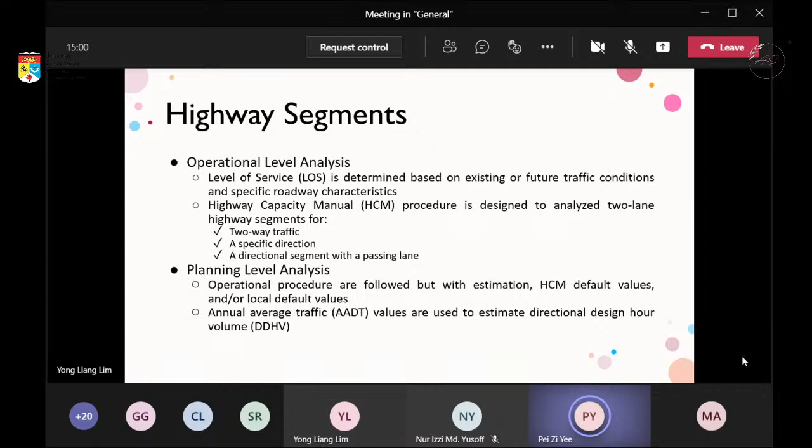At operational level analysis, level of service (LOS) is determined based on existing or future traffic condition and specific roadway characteristics. At planning level analysis, operational procedures are followed, but with the estimation of HCM default values and/or local default values.

There are two measures used to describe the service quality of two-lane highways, which are percent time spent following another vehicle (PTSF) and average travel speed (ATS). PTSF is the average percentage of time that vehicles are traveling behind slower vehicles. It is a measure of the quality of service provided by the highway. ATS is the space mean speed of vehicles in the traffic stream. It is a measure of the degree to which the highway serves its function of providing efficient mobility.

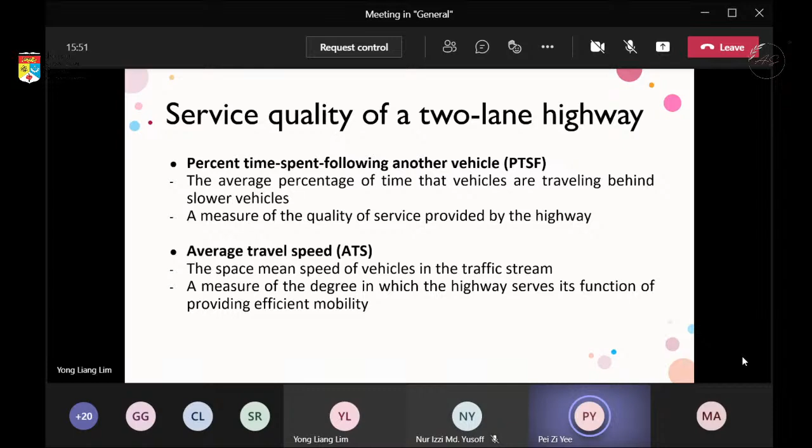Capacity of a two-lane highway is 1,700 passenger cars per hour. For extended segments, capacity will not exceed a total of 3,200, and for short sections, capacity will be about 3,200 to 3,400. Level of service is the performance of a highway at traffic volumes less than capacity. LOS for Class 1 is based on PTSF and ATS, and LOS for Class 2 is based on PTSF. LOS criteria are applied to travel during the peak 15 minutes of travel and on highway segments of significant length. The highest level is A and the lowest is F.

Okay thank you Basil. And I'm going to continue with the relationship of speed, flow, and percentage time spent following with the two-way flow rate. For the graph of average travel speed versus two-way flow rate, it shows that when the number of vehicles increases, which is the two-way flow rate increase, it will reduce the average travel speed as shown in the graph. For the graph of percentage time spent following versus two-way flow rate, it shows that when the number of vehicles increases, it increases the percentage time spent behind slower vehicles.

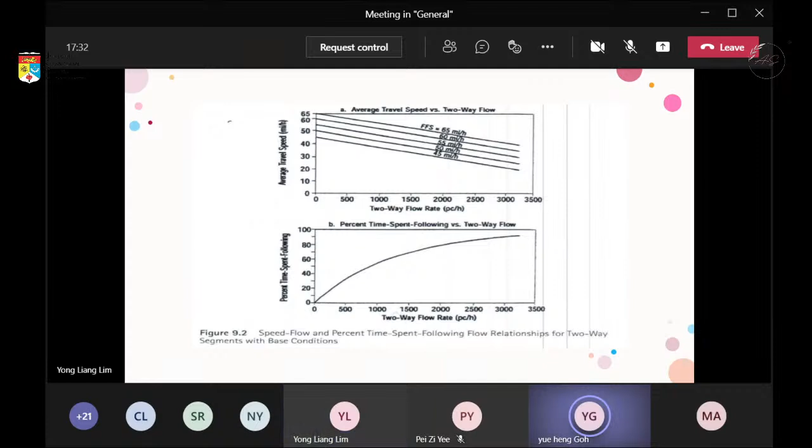So now I'm going to talk about the characteristics of every level of service from A to F. Level of service A is the highest quality service that can be achieved. Motorists are able to travel at their desired speed. The need for passing other vehicles is below the capacity for passing, and few platoons of 3 or more cars are observed. For Class 1 highway, average travel speed (ATS) is 88 km per hour or greater. For PTSF, the average percentage of time that vehicles are traveling behind a slow vehicle is 35% of the time. And the maximum service flow rate two-way under base condition is 490.

Level of service B: if vehicles are to maintain the desired speeds, the demand for passing other vehicles increases significantly. Class 1 highway average travel speed is 80 to 88 km per hour. PTSF travel delays are between 35% to 50% of the time. The maximum service flow rate under base condition is 780.

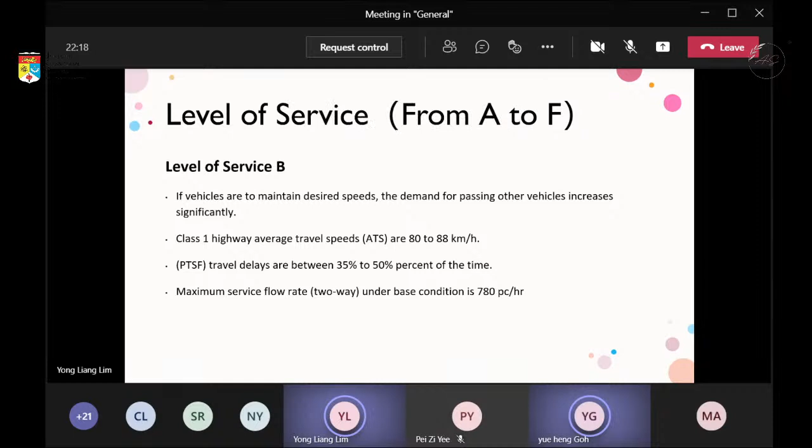As this slide shows, the average travel speed ATS is 72 to 80 km per hour, and the PTSF is between 50% to 65%. So level of service C will be the answer of that question.

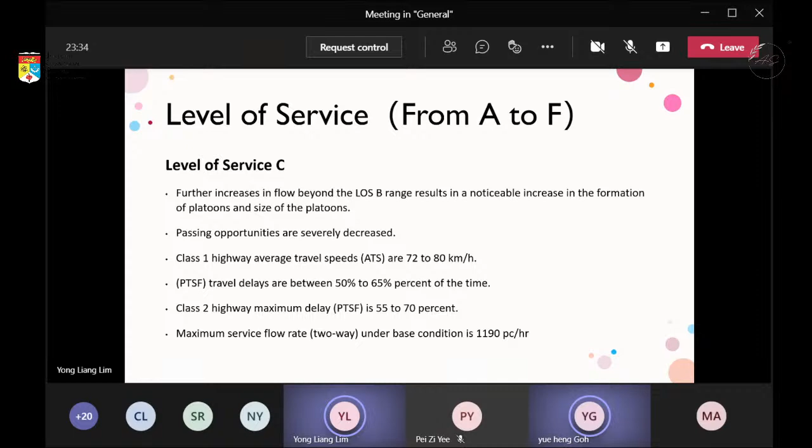So you can go and do the previous one. The answer shows that segment 2 is level of service type C. So if you go to this slide, you can actually find the answer below. This is all for me, so I'm going to pass to another member to continue our presentation. Thank you.

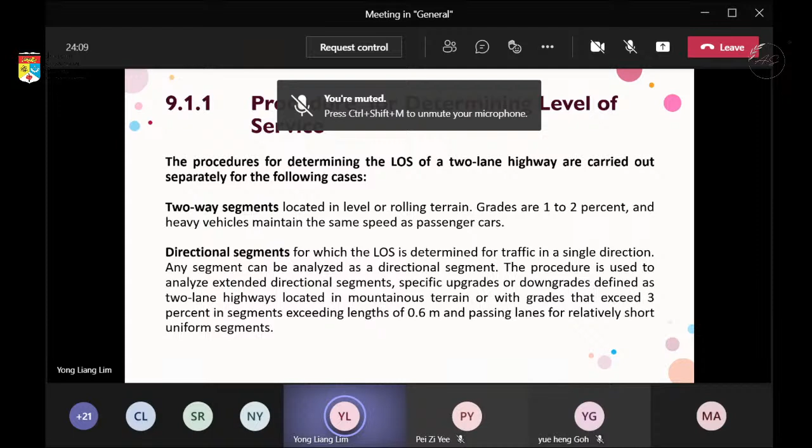I would like to present about the procedure for determining level of service. There are 2 ways to determine the level of service. The first is two-way segments located in level or rolling terrains, with grades of 1 to 2%, where heavy vehicles maintain the same speed as passenger cars. The second is a directional segment, for which the LOS is determined for traffic in a single direction. Any segment can be analyzed as a directional segment. The procedure is used to analyze extended directional segments, specific upgrades or downgrades defined as 2-lane highways located in mountainous terrain or with grades exceeding 3% in segments exceeding lengths of 0.6 miles, and passing lanes for relatively short uniform segments.

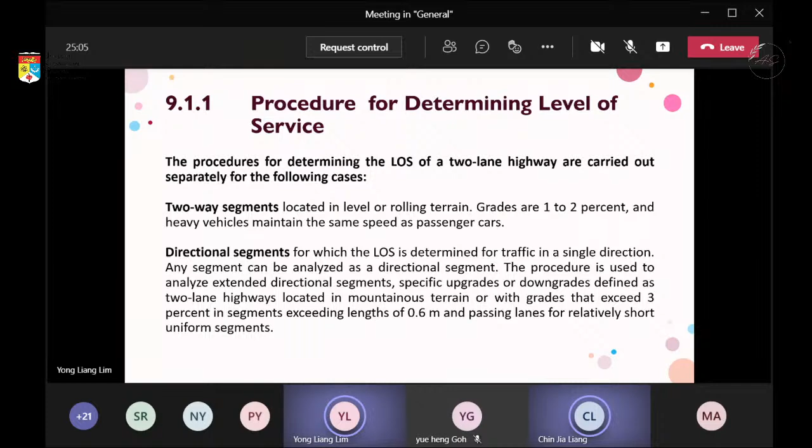This is the two-way segment. The analysis of two-lane roads for two-way segments is usually performed on extended lengths when the segment length is at least 2.0 miles and the segment is located in level or rolling terrain. The level terrain segment contains flat grades of 2% or less, where heavy vehicles are able to maintain the same speed as passenger cars throughout the segment. The rolling terrain segment contains short or medium length grades of 4% or less.

Heavy truck speeds are slower than passenger car speeds but are not at crawl speed. If grade exceeds 4%, the two-way segment procedure cannot be used but must be analyzed using the specific grade procedure.

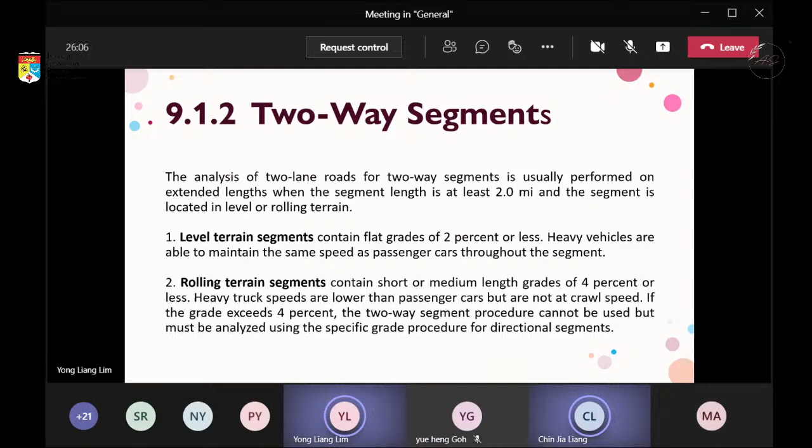For direction segments, here is the formula to calculate the two-way segment: PTSF equals BPTSF plus FD over NP. FD over NP is an adjustment in PTSF to account for the combined effect of directional distribution of traffic and non-passing zones. Where BPTSF is the base percent time spent following for both directions, computed using equation 9.2.

BPTSF equals 100 times 1 minus exponent of 0.000879 VP. VP is the passenger car equivalent flow rate for the peak 15 minute period, computed using equation 9.3.

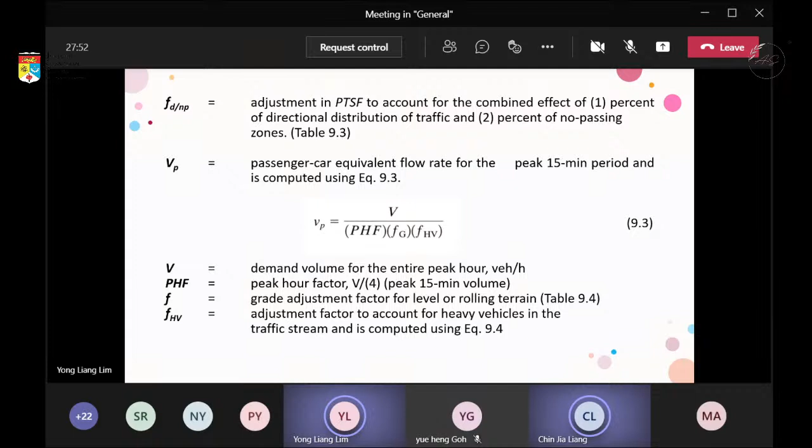VP can be found using equation 9.3: V over PHF times FG times FHV. V is the demand volume for the entire peak hour, PHF is the peak hour factor, FG is the grade adjustment factor for level or rolling terrain, and FHV is the adjustment factor to account for heavy vehicles in the traffic stream, computed using equation 9.4.

This is equation 9.4. PT and PR are the decimal portion of trucks, buses, and RVs in the traffic stream. For example, if there are 22% trucks in the traffic stream, then PT is equal to 0.22.

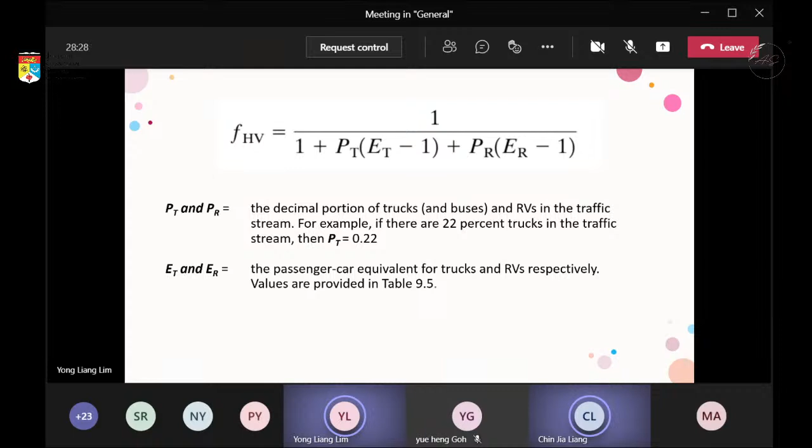ET and ER, the passenger car equivalents for trucks and RVs, respective values are provided in table 9.5.

Since the values of ET and ER are functions of two-way flow rates in PC per hour, an iterative process is required in which a trial value of VP is based on the PHF only. Then a new value of VP is computed using appropriate values of ET and ER. If the second value of VP is within the range used to determine truck and RV equivalents, the computed value is correct. If not, a second iteration is required using the next higher range of flow rate.

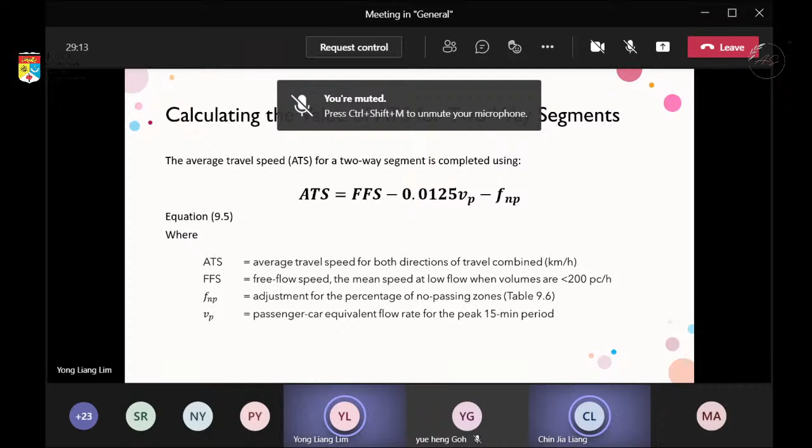Now we're going to discuss how to calculate the value of ATS, average travel speed, for a two-way segment. The average travel speed ATS equals FFS minus 0.0125 times VP minus FNP.

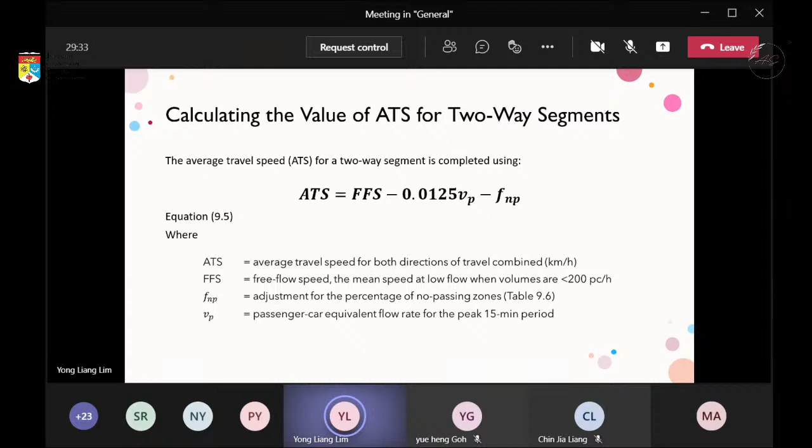First, we need to know how to calculate FFS, the free flow speed. There are two ways to calculate it: one is for known field data, and one is for unknown field data. For known field data, there are two cases.

For measurements at volumes smaller than or equal to, or bigger than, 200 passenger cars per hour, we use the following equation: FFS equals SFM plus 0.01249 times VF over FHV. The FHV is discussed previously in the previous slide.

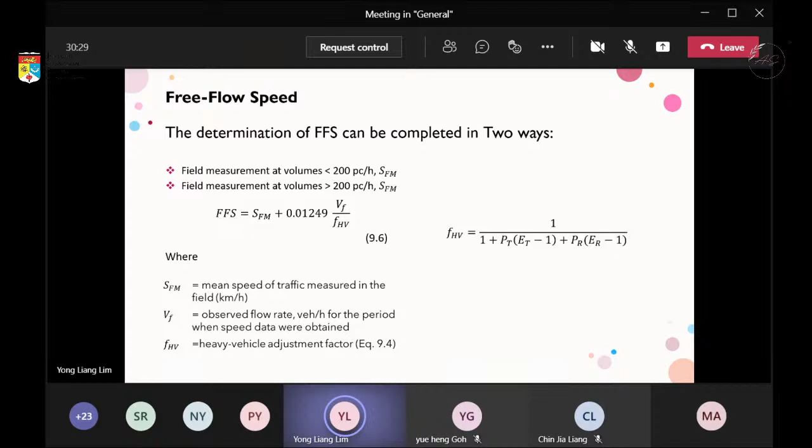For the unknown field data equation, we use FFS equals BFFS minus FLS minus FA. FLS is the adjustment for lane and shoulder width, and FA is the adjustment for the number of access points per mile.

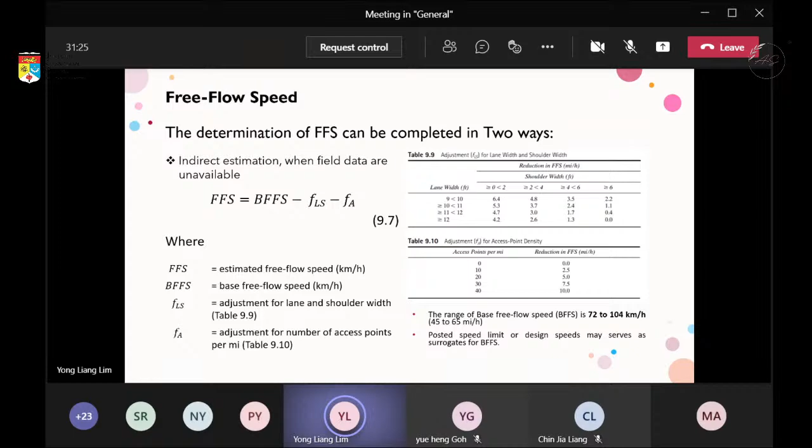For FLS, we use table 9.9 as shown on the right hand side, and for FA we use table 9.10. BFFS is the base free flow speed, with a range of 72 to 104 kilometers per hour.

Now we're going to discuss example 3, on how to compute the value of average travel speed for a two-directional two-lane highway.

Based on the equation, use the data provided in example 9.2 to estimate the average travel speed. Assume the base free flow speed BFFS is the posted speed of 96 kilometers per hour. The section length is 9.6 kilometers. Lane width is 3.35 meters, shoulder width is 1.2 meters, and there are 20 access points per kilometer.

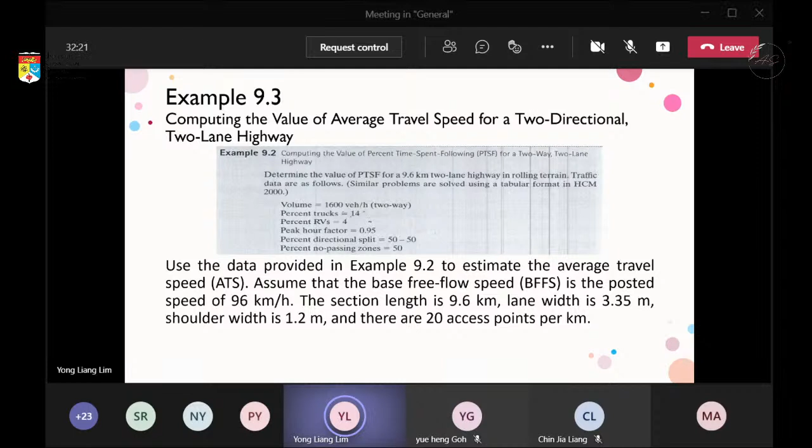Step 1, we're going to find the FFS first. In order to calculate the ATS, we need to first find the free flow speed, using the equation shown in the previous slide.

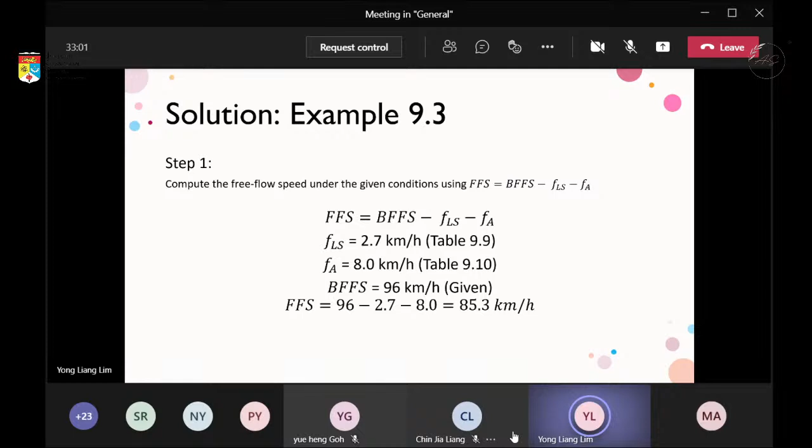First, we can get FLS equal to 2.7 kilometers per hour, FA equal to 8.0 kilometers per hour, and BFFS equal to 96 kilometers per hour. Therefore, we can get the FFS equal to 85.3 kilometers per hour.

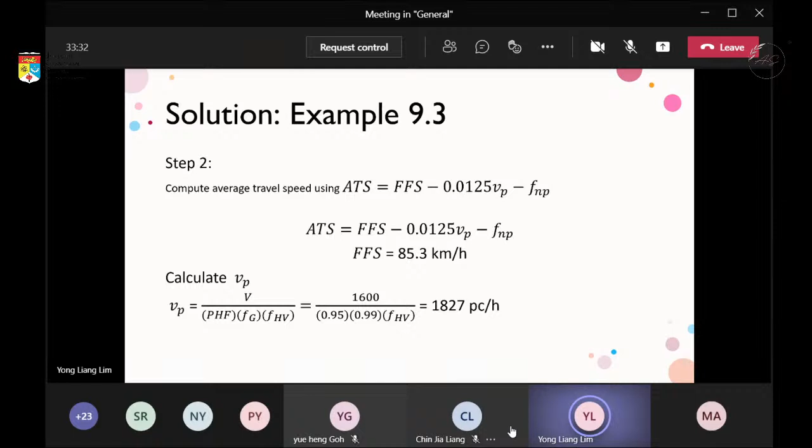Then we can substitute the value inside the ATS. But first, we need to know two unknowns, VP and FNP. For VP, we're going to use this formula. By substituting the data given, we can get VP equal to 1,827 passenger cars per hour.

And with the following data given, we can get the FHV. By substituting it in the following equation, we get FHV equal to 0.931. Substitute all the values inside the ATS equation, and we get ATS equal to 61.2 kilometers per hour.

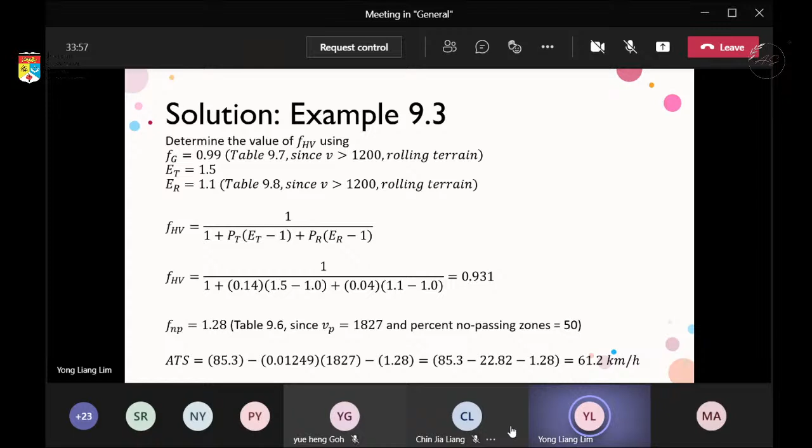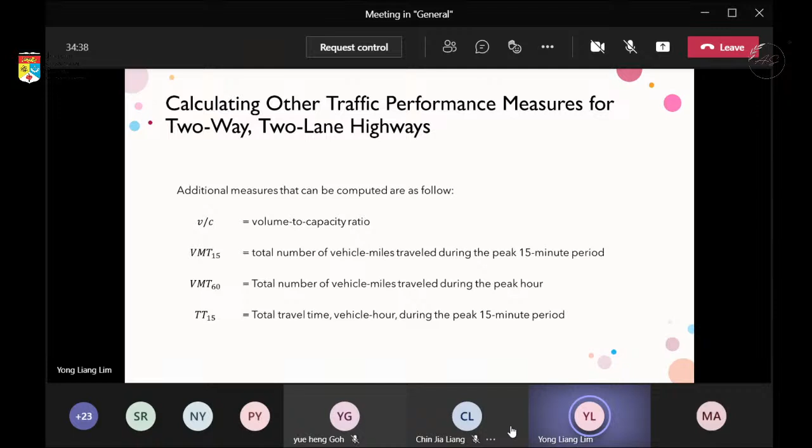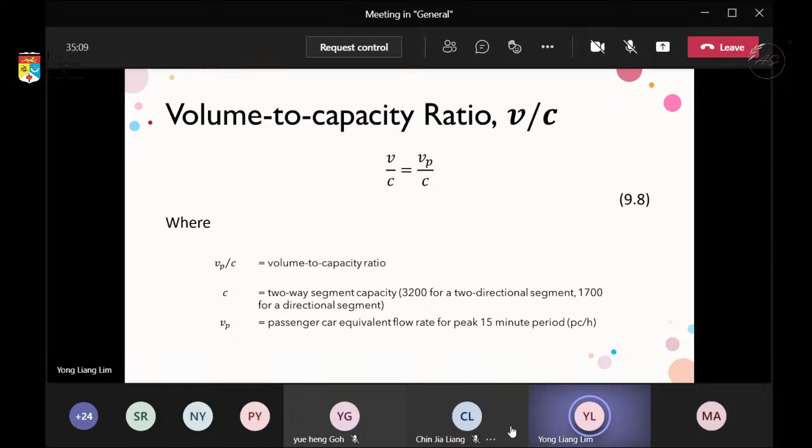First, the volume to capacity ratio, V over C, we can get also from V over C equal to VP over C. VP over C is the volume to capacity ratio. C is the two-way segment capacity, normally 3,200 for the two-directional segment and 1,700 for a directional segment.

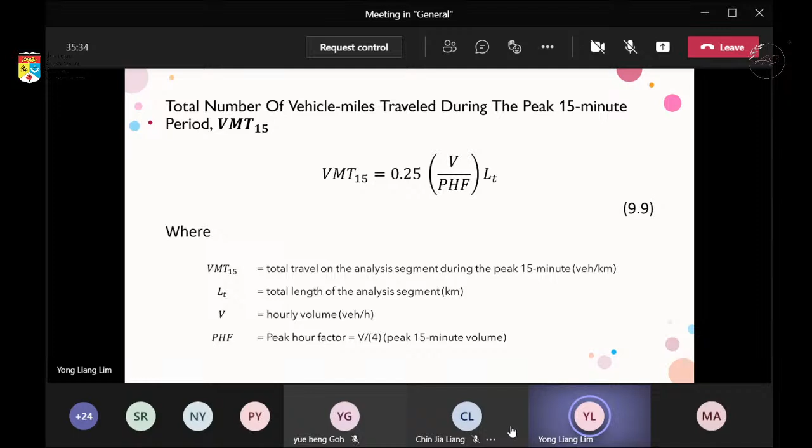The second is VMT15 equal to 0.25 times V over PHF times LT. PHF is the peak hour factor, while LT is the total length of the analysis segment in kilometer units.

Next is VMT60 equal to V times LT. LT as shown just now.

So now we proceed to TT15. TT15 equal to VMT15 divided by ATS. We calculate like the previous slide to get the ATS first, then we can substitute it into the following equation to get the TT15.

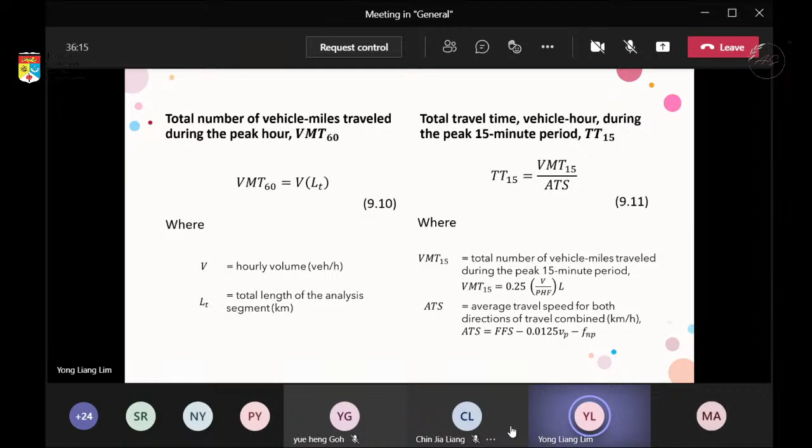Now I'm going to discuss example 9.4, level of service and performance measure for two-lane, two-directional highways. We'll use the data from and the results in example 9.2 and 9.3 to determine the following.

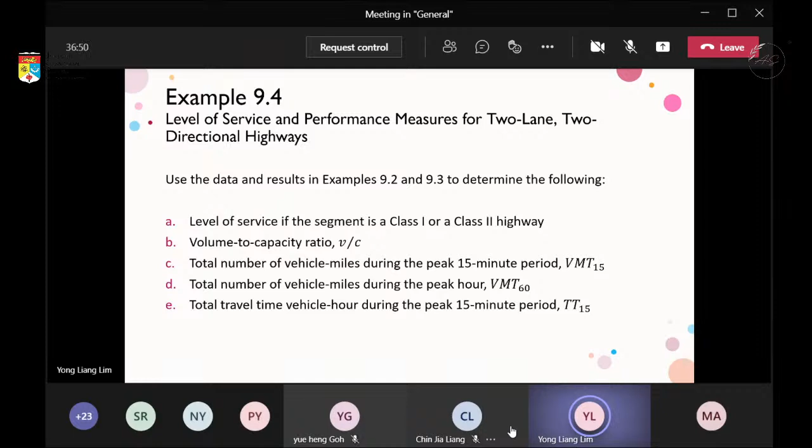First, calculate the level of service. Second, the volume to capacity ratio. Third, VMT15, and VMT60 and TT15.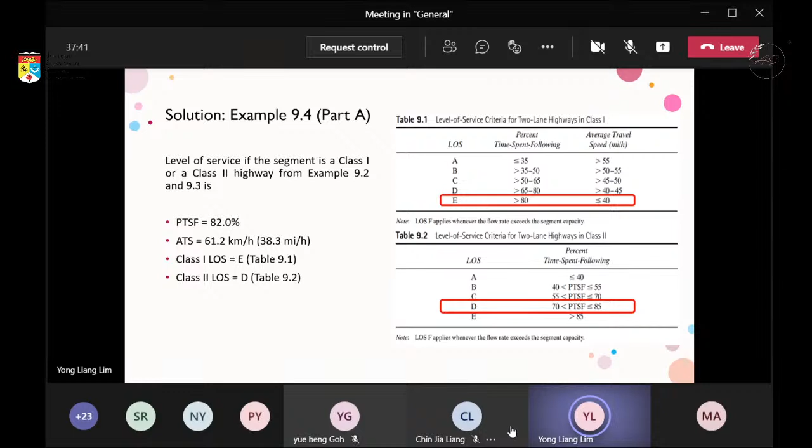For part B and C, part B is just substituting the value of VP over C, then we get the VC equal to 0.57, while for VMT15 we use the formula 0.25 times 1600 divided by 0.95 times 9.6. We can get VMT15 equal to 4042 vehicles per kilometer.

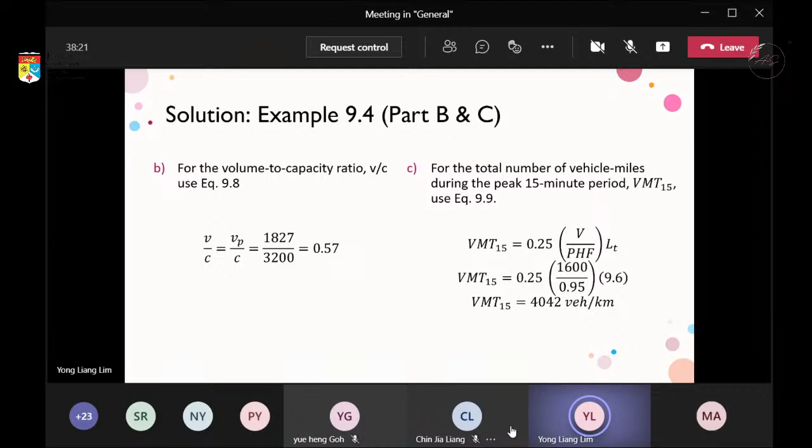For part D and E, the VMT60, by substituting the value V times LT, we get the value 15,360 vehicles per kilometer. And for the total travel time during the peak 15-minute periods, TT15, we use back the value of VMT15, 4,042 divided by 61.2, to get 66 vehicle hours.

Now I'm going to pass to my groupmate to continue our presentation.

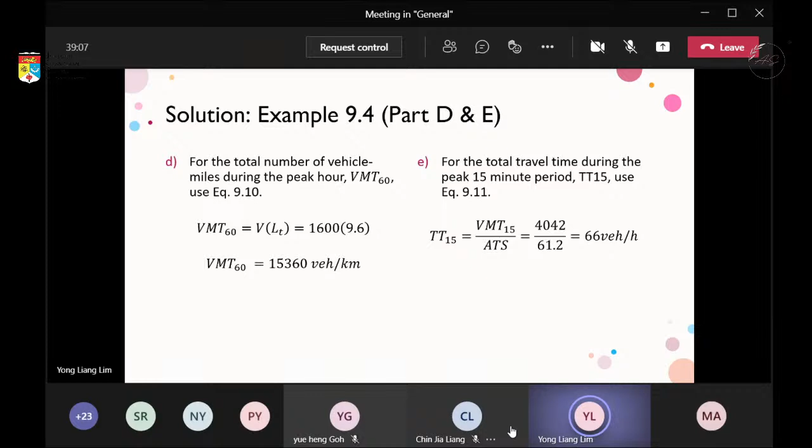Okay, directional segment. There are three categories of directional segment considered. First is extended segment, located in level or rolling terrain with a length of at least 2 miles. The second is specific upgrade or downgrade, located in mountainous terrain or with grade of at least 3% and segment length of at least 0.6 mile long.

The number 3 is passing lane. A passing lane added within a section in level or rolling terrain, or as a truck climbing lane.

Okay, to calculate the value of PTSF for directional segment in level or rolling terrain, we use equation 9.12. To calculate this PTSFD, we need PTSFD equal to BPTSFD plus FNP. So BPTSFD equal to 100 times 1 minus E power of AVD power of B.

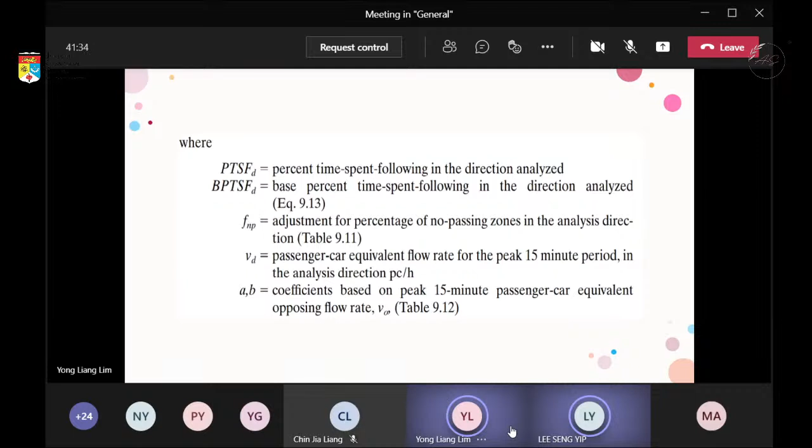I will go through example 9.5, computing the value of percent time spent following (PTSF) for the peak direction on a two-lane highway. I will read the example.

During the peak hour on a class 1 two-lane highway in rolling terrain, volume northbound is 1,200 vehicles per hour and volume southbound is 400 vehicles per hour. The PHF is 0.95, with 14% trucks/buses and 4% RVs. Lane width is 11 feet, shoulder width is 4 feet. The roadway section is 5 miles long with 20 access points per mile. There are 50% no-passing zones and the base free flow speed is 60 miles per hour. Determine the percent time spent following in the peak direction of travel.

For step 1, we need to compute the peak 15-minute hourly passenger car equivalent in the peak direction, VD, and in the opposite direction, V0. We try the value of VD per PHF equal to, so we get 1,263 vehicles per hour. Next we determine FG and ET and ER as in the previous slide. We compute FHV with this equation and get 1.00.

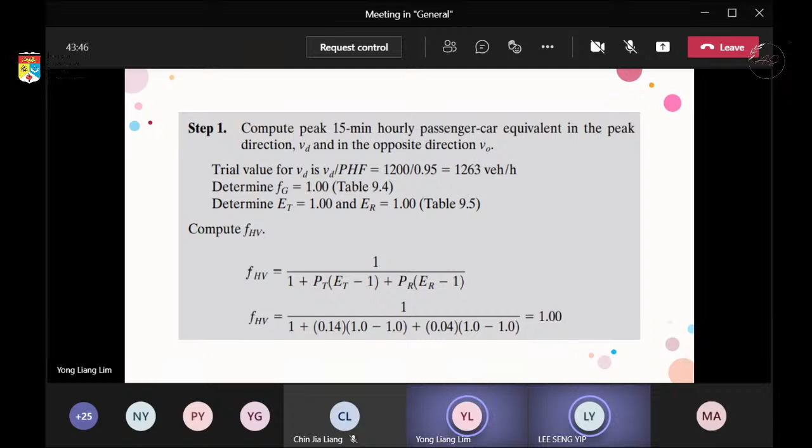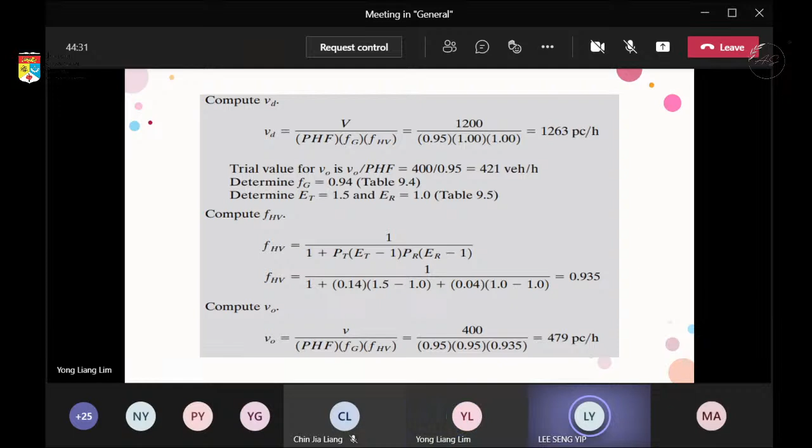We compute VD using the equation V per PHF times FG times FHV, and get 1,263 PC per hour. Then we try V0 per PHF equal to 400 per 0.95, giving 421 vehicles per hour. We compute FHV again and get 0.935. After that we compute V0 and get 479 PC per hour.

For step 2, we compute the base percent time spent following (BPTSF) using equation 9.13, shown in the previous slide. We determine the values A and B from table 9.12 by interpolation, then calculate BPTSFD equal to 84.7%.

For step 3, we compute the percent time spent following (PTSF) using equation 9.12. We use table 9.11 to determine FNP, obtained from the equation. We calculate PTSFD equal to BPTSFD plus FNP, so 84.7 plus 11.5, giving 96.2%.

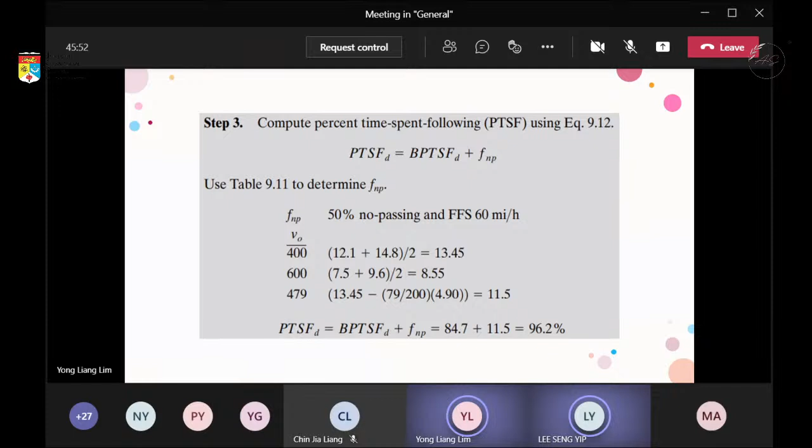Hello. I'm going to talk about the value of ATS, average travel speed for a directional segment in level or rolling terrain. The equation for ATS is FFS minus 0.0125 times (V plus V0) minus FNP. ATS is the average travel speed in the analysis direction in km/h. FNP is the adjustment for the percentage of no-passing zones in the analysis direction from table 9.13, and FFS is the free flow speed in the analysis direction.

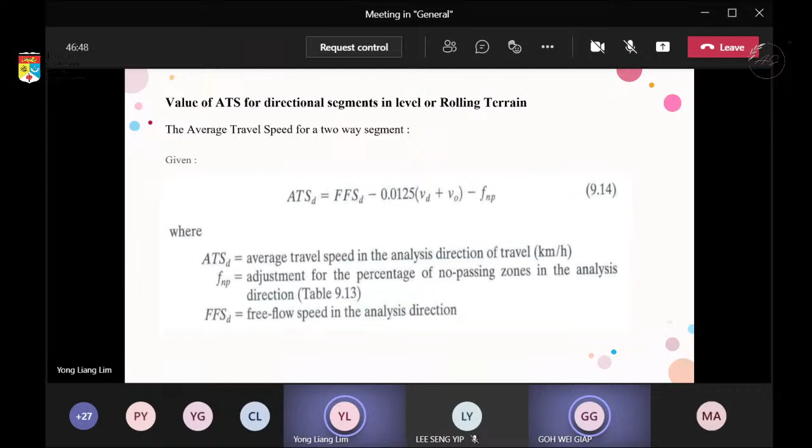I'm going to go through example 9.6, about the ATS for the peak direction on a two-lane highway. Step 1 is the same as in example 9.3. We know that FFS is equal to 85.3 km per hour, and now we are going to compute V.

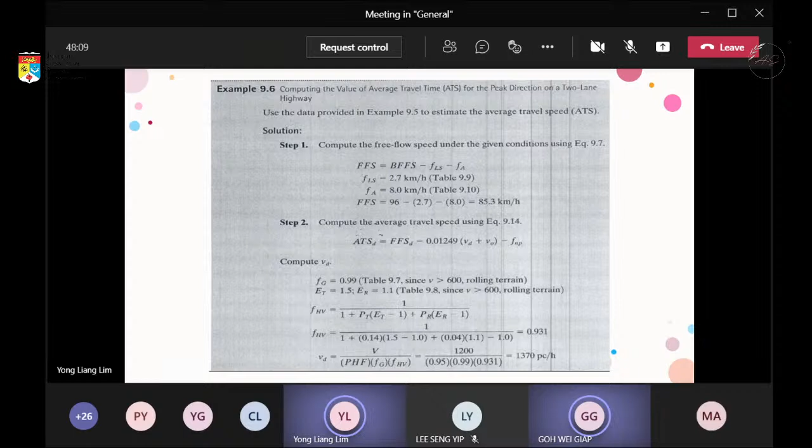From table 9.7, our V is more than 600 and it is rolling terrain, so FG is 0.99, ET is 1.5, ER is 1.1, from table 9.8. We substitute into the equation to find FHV and get 0.931. Substituting V equals 1,200, PHF is 0.95, FG is 0.99, FHV is 0.931, we get the value 1,370 passenger cars per hour.

Now we compute V0 using the same procedure. First we find FG from table 9.7, with V equal to 400, and from the table we find FG is 0.93, ET is 1.9, ER is 1.1 from table 9.8. We get FHV equal to 0.884, and V0 equal to 512 passenger cars per hour. Both V and V0 are less than the total capacity.

The capacity of a one-way segment is 1,700. FNP is equal to 1.6 using table 9.13 by interpolation, and we get ATS equal to 85.3 minus 0.0125 times (1,370 plus 512) minus 2.56. The 2.56 is the conversion of FNP 1.6, because the table shows 1.6 in miles per hour, so we convert it into kilometers per hour, from 1.6 to 2.56. So our total ATS is 60 km per hour.

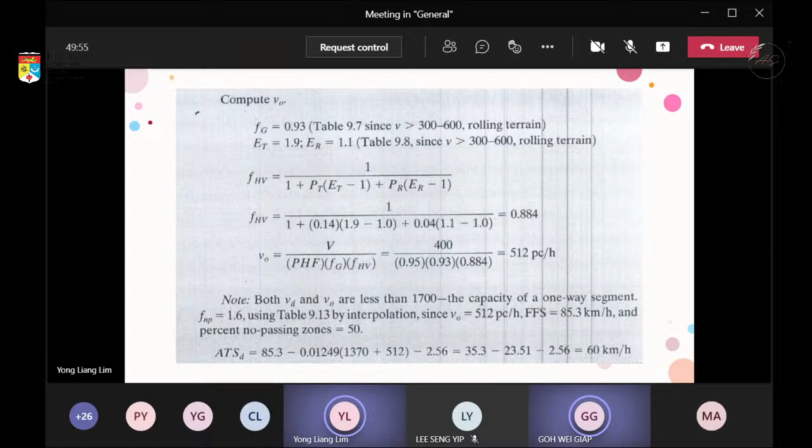Now we will discuss example 9.7. Use the data and results from examples 9.5 and 9.6 to determine the following: Question A, level of service if the segment is a class 1 or class 2 highway.

If the segment is class 1, refer to table 9.1. Since PTSF equals 96.2%, which is larger than 80%, it is LOS E. If the segment is class 2, refer to table 9.2. PTSF is larger than 85%, so it is LOS E.

Question B, volume to capacity ratio using equation 9.8 equals VP over C, equals 1,370 over 1,700, where 1,700 is the capacity of the one-way segment. We get the answer of 0.81.

Question C, total number of vehicle miles during the peak 15-minute period, VMT15, using equation 9.9 equals 0.25 times V times LT over PHF. By substituting the value, we get the answer of 3,032 vehicle kilometers.

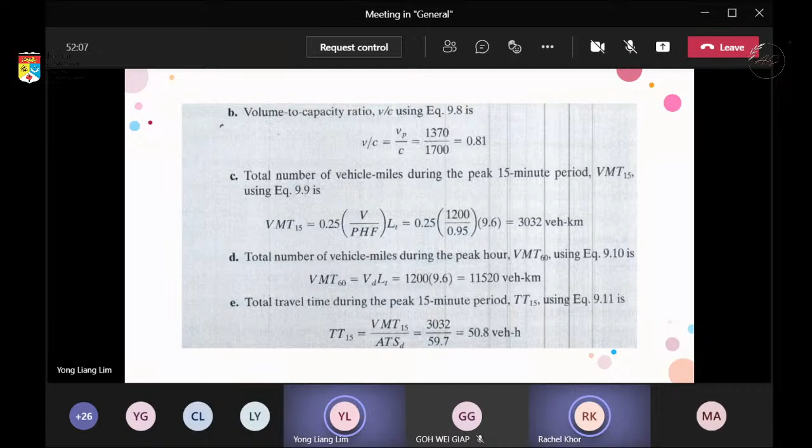Total travel time during the peak 15-minute period, TT15, using equation 9.11 equals VMT15 over ATSD. We get the answer of 50.8 vehicle hours. Thank you. Next.

Okay, we will pass to the other member. Thank you. So we are going to discuss the value of PTSF and ATS for directional segments of specific upgrade, with grade of 3% or more and at least 0.6 mile in length.

Length of 0.25 miles or more and upgrade of 3% or more. Segments in mountainous terrain are to be analyzed as a specific upgrade. When grade varies within a section, a composite grade is computed as the total change in elevation divided by the total length, expressed as a percentage. The effect of heavy vehicles is determined based on the average segment grade and segment length.

To calculate PTSF, first we must determine FG from table 9.14, ETER from table 9.15, then FHV using equation 9.4. PT and PR is the decimal portion of trucks and RVs in the traffic stream. ET and ER is the passenger car equivalent for trucks and RVs respectively.

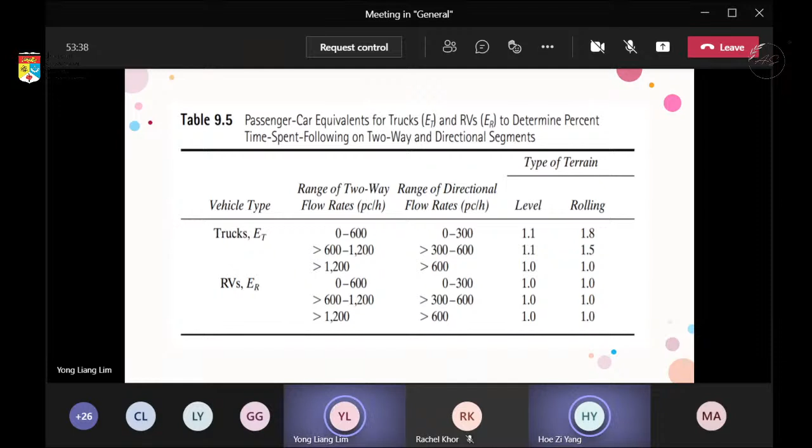This is table 9.5 to determine the ET and ER. Next, table 9.14 and 9.15. Table 9.14 is to determine the grade adjustment factor. Table 9.15 is ETER for estimating percent time spent following on specific upgrade.

To calculate ATS, firstly we must determine FG from table 9.16, ETER using tables 9.17 and 9.18, then FHV using equation 9.4. After that, using equation 9.3, we determine VD. Next, using equation 9.3 to determine V0. We should note that when computing V0, the values used for FHV and PHF should apply to the opposing direction of travel. Then finally, we compute PTSF and ATS following the procedure used for directional analysis as described for level and rolling terrain.

Table 9.16 is used to determine the grade adjustment factor on specific upgrade. Table 9.17 is used to determine ET for estimating average travel speed on specific upgrade. Table 9.18 is used to determine ER on specific upgrade.

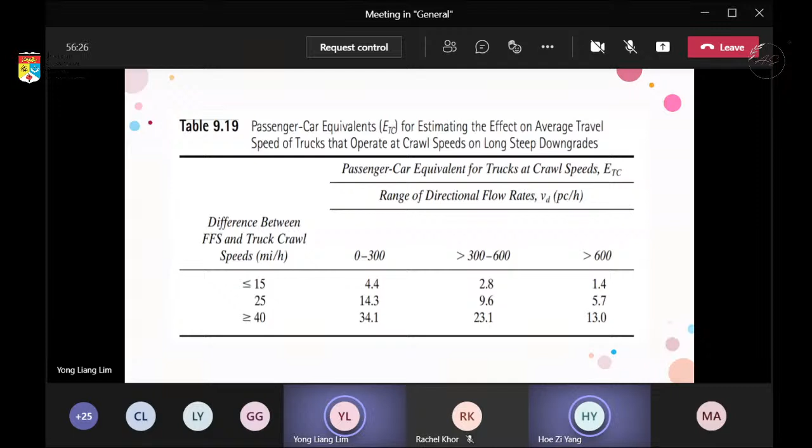Example 9.8 to compute the volume on a directional segment for specific upgrade and downgrade. First, we determine the value of VD for the specific upgrade: determine FG using table 9.14, ET and ER using table 9.15, then FHV using equation 9.4. After that, we use the values to compute VD using equation 9.3, and we get VD equal to 1,405 passenger cars per hour.

Next, we determine V0 for the specific downgrade: FG on downgrade, then ETC using table 9.19, ET and ER using table 9.5, and FHV using equation 9.4. After that, we substitute the values into equation 9.3 to determine V0 equal to 468 passenger cars per hour.

Next, calculating percent time spent following, PTSF, for directional segment.

Hello, can you hear? Low volume. Hello.

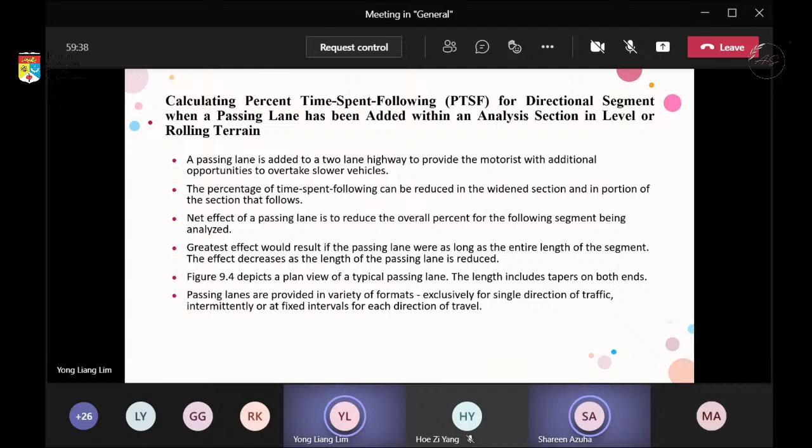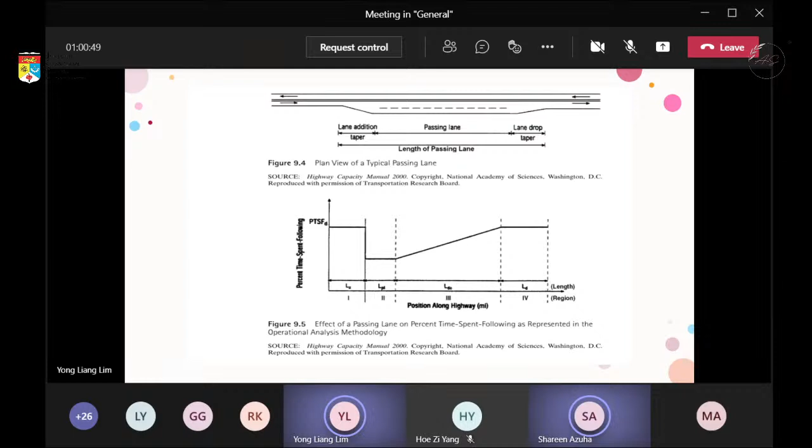For region 4, it is the remaining downstream region within the segment and is known as LD. This is beyond the effective length of the passing lane. The passing lane value PTSFD is equal to the upstream section of LU.

The average value of PTSF for the entire analysis segment with a passing lane, PTSF PL, is calculated using this equation. If the full downstream length is not reached because a traffic signal or town interrupts the analysis section, then L is replaced by a shorter length LDE, as shown in equation 9.17.

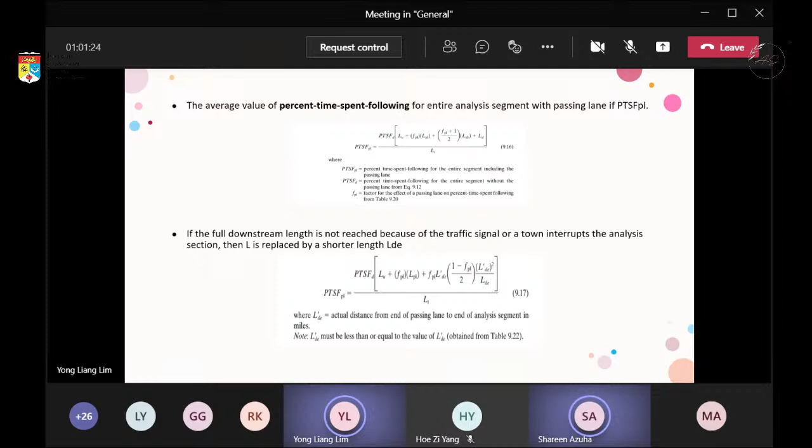Next is calculating average travel speed (ATS) for directional segments when a passing lane has been added within an analysis section in level or rolling terrain.

Figure 9.6 illustrates the changes in the value of average travel speed ATS that occur within each of the four regions when a passing lane has been added. Below are the values for region 1.

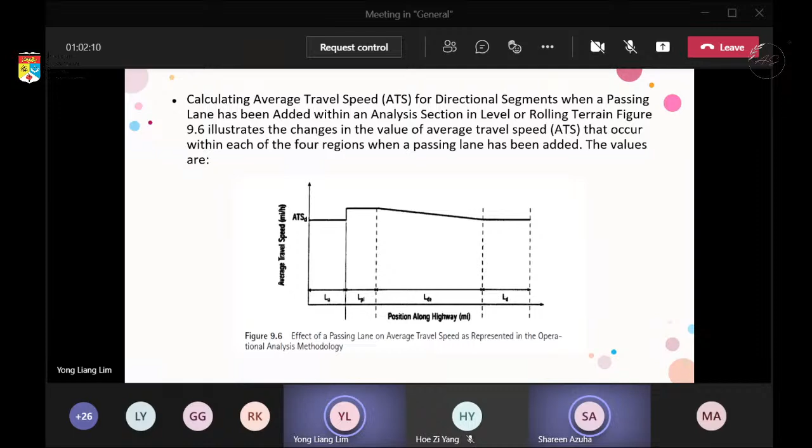For region 1, the average speed in the upstream region is ATSd for length LU. In region 2, the average travel speed in the passing lane increases by factor FPL, provided in Table 9.20. The values range from 1.08 to 1.11 depending on the directional flow rate VD.

Region 3 is the average travel speed within the downstream length, which decreases linearly from the value in region 2 to ATS at LDE, equal to 1.7 miles, as shown in 9.22.

Region 4 is the average travel speed in the downstream region, ATSD, for length LD. To compute the average speed for the analysis section, it is first necessary to compute the individual travel times within regions 1, 2, 3, and 4. The average travel speed is the total analysis length LT divided by the sum of the four travel times.

The derivation below produces equation 9.18. The value of ATS PL is the effect on the average travel speed in the analysis section as a result of adding a passing lane.

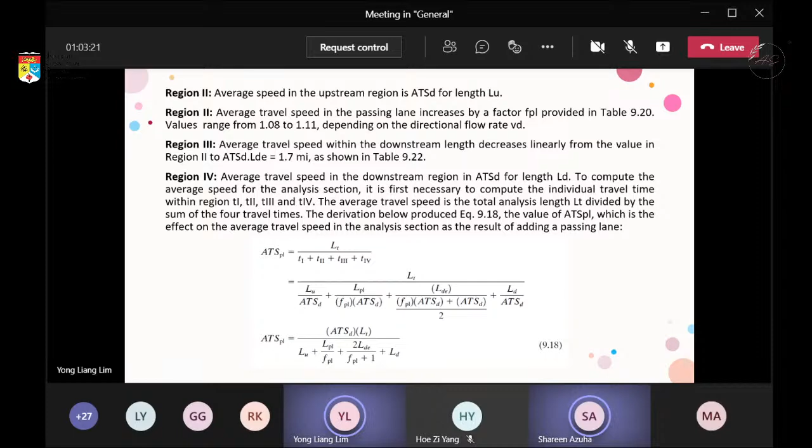Next, we are going to see example 9.9, which is the last example for our presentation: computing level of service for 2-lane directional highways with a passing lane.

Use data and results from example 9.5 and 9.6 to determine the LOS if a passing lane is added. The length of the passing lane is 1 mile and is designed to begin 1 mile downstream from the beginning of a 6-mile analysis section. From examples 9.5 and 9.6, we get PTSF equal to 96.2% and ATS equal to 37 miles per hour.

For step 1, determine the length of each region. For region 1, LU is equal to 1 mile. For region 2, LPL is equal to 1 mile.

For region 3, for PTSF, LDE is equal to 3.6 miles, which we can see from Table 9.22. From example 9.5, the VD is 1263 passenger cars per hour, which is greater than 1000, so we choose PTSF LDE equal to 3.6 miles.

So the FPL is 0.62. For ATS LDE, referring to example 9.6, the VD is equal to 1370 passenger cars per hour, which is greater than 1000. So the ATS LDE is equal to 1.7 miles from Table 9.22, and FPL is equal to 1.11 from Table 9.20.

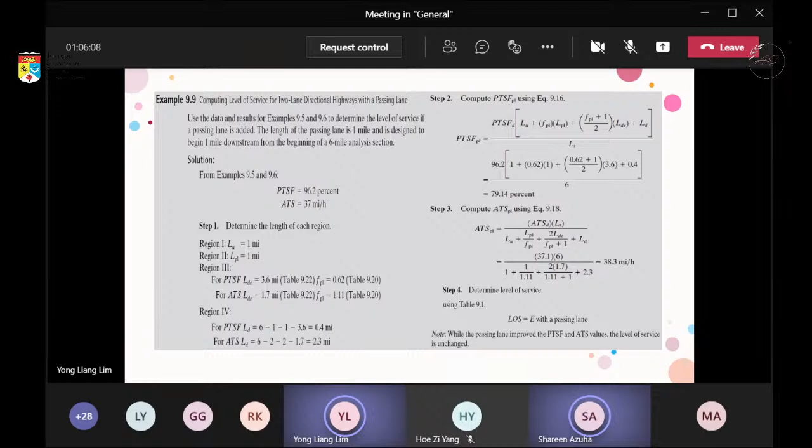79.14%. For step 3, we can compute the ATSPL using equation 9.18. Substitute also and we get 38.3 miles per hour. So with this answer, we refer to table 9.1, which is LOS criteria for 2-lane highways in class 1. So we can get the LOS is equal to E with a passing lane.

Okay, next, calculating the average travel speed ATS for directional segment when a climbing lane has been added within an analysis section on an upgrade. So it's warranted into 2 lane highways when one of the following conditions is met. First is directional flow rate on the upgrade 200 vehicles per hour. Second is directional flow rate for trucks on the upgrade 20 vehicles per hour. And when any of the following conditions apply: speed reduction for trucks is 10 miles per hour for a typical heavy truck, LOS is E or F on the grade, or LOS on the upgrade is 2 or more level of service values higher than approach grade.

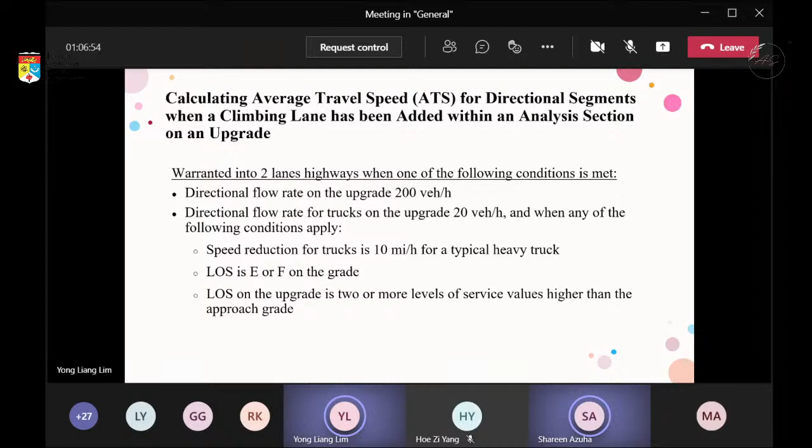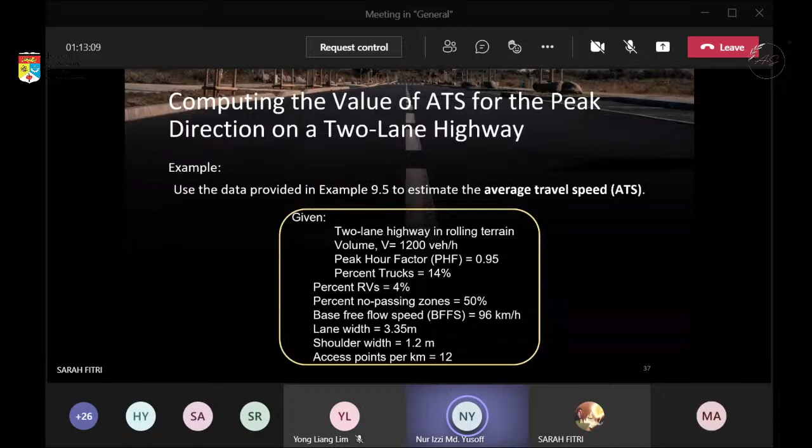Okay, good morning everyone. Today we'll be presenting on the topic capacity and level of service for highway segment. So let's get into the topic. Next slide.

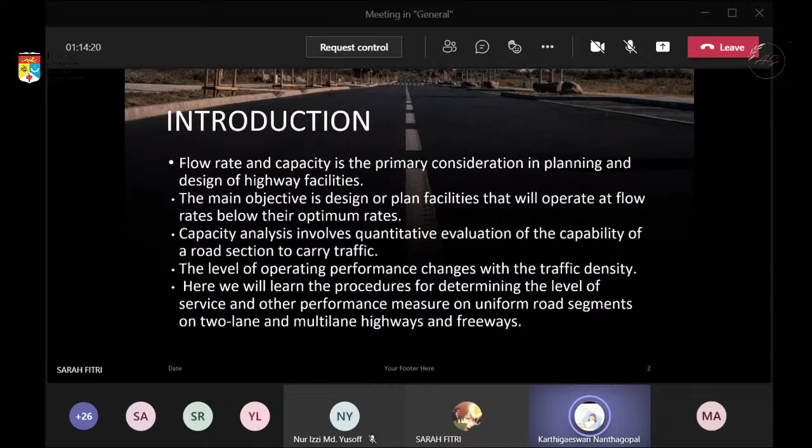As our previous group said, flow rate and capacity is the primary consideration in planning and designing of highway facility. The main objective is to design or plan a facility that will operate at flow rates below their optimum rate. While the capacity analysis involves quantitative evaluation of the capability of a road section to carry traffic, the level of operating performance changes with traffic density. So in this topic, we will learn about the procedure for determining the level of service and other performance measures on uniform road segments on two-lane and multi-lane highways and freeways. This will lead us to plan a design and optimum roadway.

Next. The procedures developed for two-lane highway segments provide the basis to evaluate levels of service and capacity. For the highway segment, there are two levels of analysis, which are planning application and operational. Next slide.

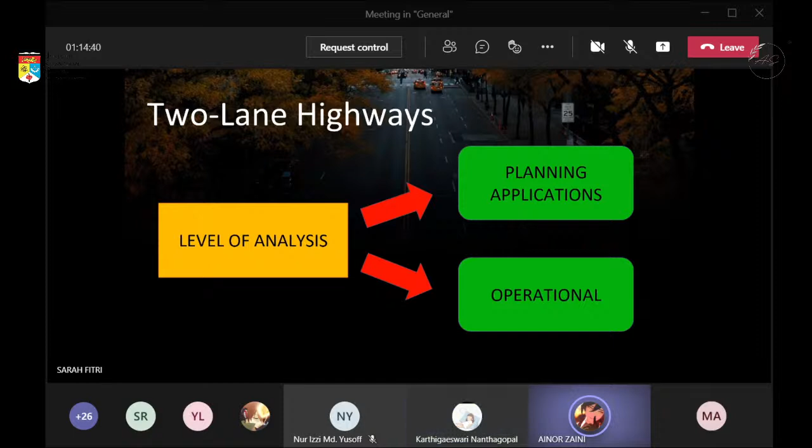There are two classes of two-lane highways that are defined according to their functions. Class 1 functions as primary arterials, daily commuter routes, and links to other arterial highways, so motorists expect to travel at a high speed. For Class 2, serve as access to Class 1, scenic byways, or may be used by motorists for sightseeing. It is located in rugged terrain and motorists expect to travel at lower speeds than Class 1 routes. Next slide.

At an operational level of analysis, level of service is determined based on existing or future traffic conditions and specific roadway characteristics. The highway capacity manual procedure is designed to analyze for two-way traffic, for a specific direction, or for a directional segment with a passing lane. At the planning level of analysis, operational procedures are followed but with estimates, HCM default values, and/or local default values. Annual average traffic values are used to estimate directional design hour volume. Next slide.

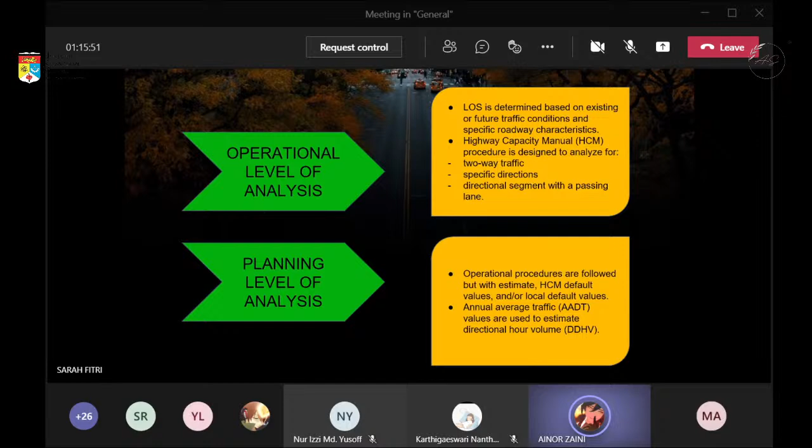There are two measures used to describe the service quality of a two-lane highway. Percent time spent following another vehicle is the average percentage of travel time that vehicles must travel behind slower vehicles. Average travel speed is the mean speed where segment length is divided by average time for all vehicles to traverse the segment in both directions during a designated interval. Next, please.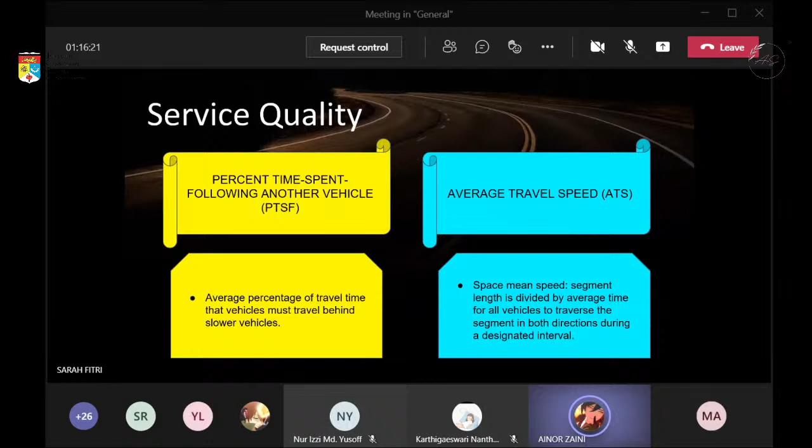Capacity of a two-lane highway for each direction of travel, nearly independent of the directional distribution of traffic, is 1,700 passenger cars per hour. For extended segments, it should not exceed a combined total of 3,200 passenger cars per hour. For short sections, capacity may reach 3,200 to 3,400 passenger cars per hour.

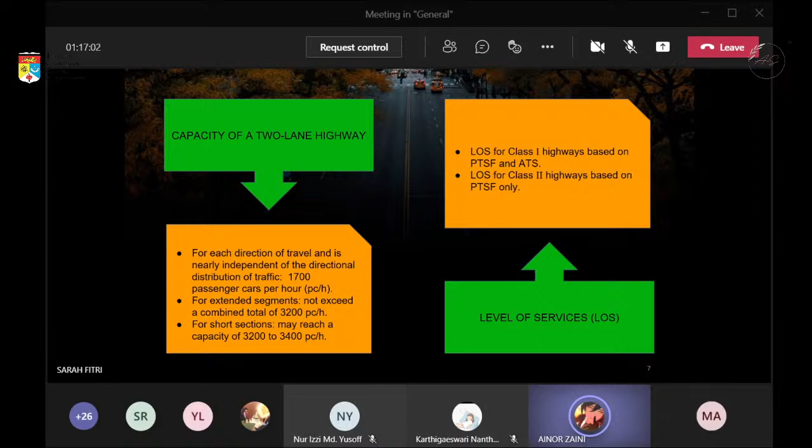Levels of service express the performance of a highway at traffic volumes less than capacity. LOS for Class 1 highways is based on PTSF and ATS, while LOS for Class 2 highways is based on PTSF only.

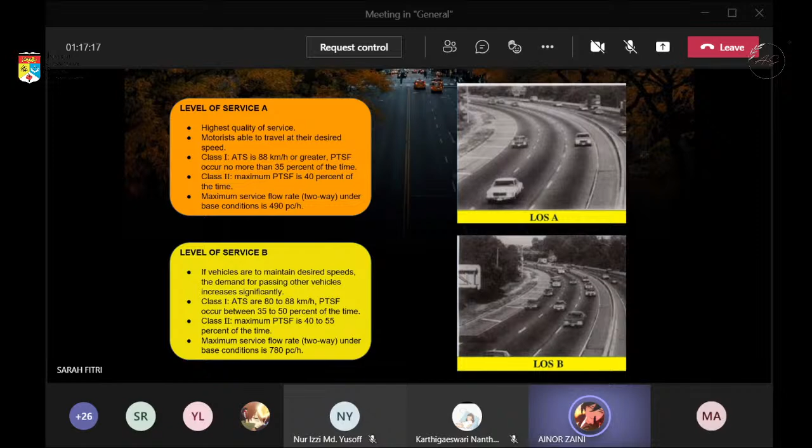LOS A is the highest quality of service, where motorists are able to travel at their desired speed. For Class 1, ATS is 88 km per hour or greater, and PTSF occurs no more than 35% of the time. For Class 2, maximum PTSF is 40% of the time. Maximum service flow rate under base condition is 490 passenger cars per hour.

LOS B is where, if vehicles are to maintain desired speeds, the demand for passing other vehicles increases significantly. For Class 1, ATS is 80 to 88 km per hour, and PTSF occurs between 35 to 50% of the time. For Class 2, maximum PTSF is 40 to 55% of the time. Maximum service flow rate under base condition is 780 passenger cars per hour.

LOS C is further increases in flow beyond the LOS B range. For Class 1, ATS is 72 to 80 km per hour, and PTSF occurs between 50 and 65% of the time. For Class 2, maximum PTSF is 55 to 70% of the time. Maximum service flow rate under base condition is 1,190 passenger cars per hour.

LOS D is where flow is unstable and passing maneuvers are difficult. For Class 1, ATS is 64 to 72 km per hour, and PTSF occurs between 65 and 80% of the time. For Class 2, maximum PTSF is 70 to 85% of the time. Maximum service flow rate under base condition is 1,830 passenger cars per hour.

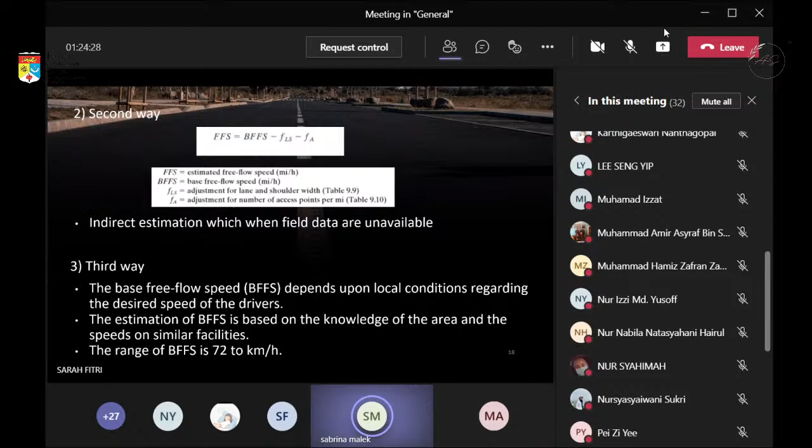Example of computing the value of average travel speed. Use data provided in example 9.2 to estimate the average travel speed. Assume that the base free flow speed BFFS is the posted speed of 60 miles per hour. The section length is 6 miles, lane width is 11 feet, shoulder width is 4 feet, and there are 20 access points per mile. Step 1, we compute the free flow speed under the given conditions using the following formula.

This is the adjustment FLS from table 9.9. This is how we got the 1.7 for FLS, and table 9.10 gives the adjustment of FA. This is how we got the access point density.

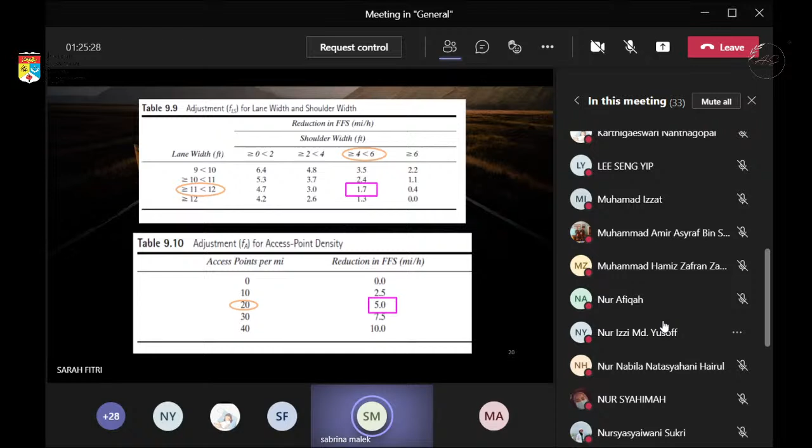Step 2 is that we compute average travel speed using equation 9.5. Using the following formula, we determine the FG following table 9.7. This is how we got the 0.99 for FG, and the V we get from the 9.2 example, rolling terrain more than 1,200.

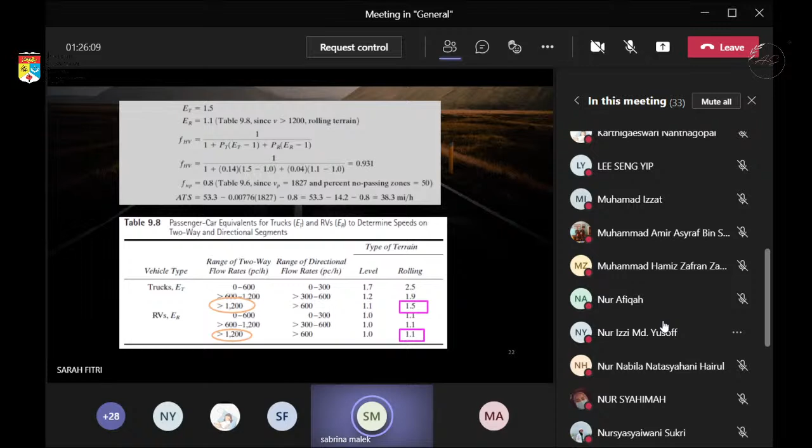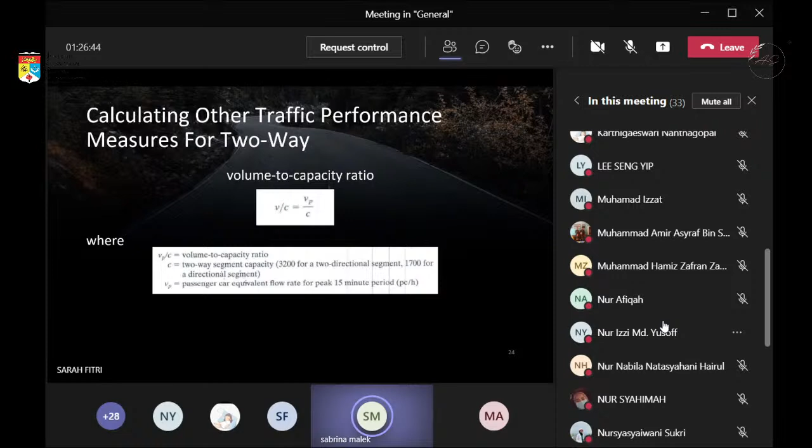Calculating the other traffic performance measures for two-way segments. There is the volume to capacity ratio, computed following this formula.

The second measure is the total number of vehicle miles traveled during the peak 15-minute period. Another additional measure is the total travel time in vehicle hours during the peak 15-minute period.

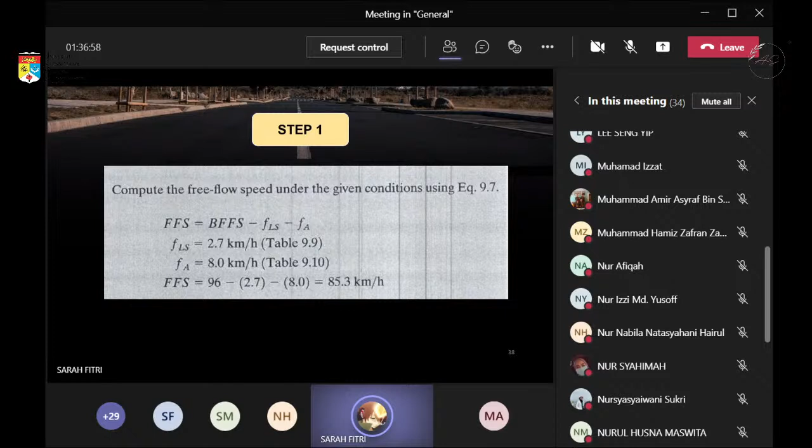We substitute the values into the FFS equation and got 85.3 kilometers per hour. Next, we compute the ATS.

Before that, we need to find VD, the passenger car equivalent flow rate for the peak 15-minute period in the analysis direction, in passenger cars per hour. We need to find FG based on table 9.7 and ET and ER based on table 9.8, then substitute into equation 9.4 to get FHV, the adjustment factor for heavy vehicles in the traffic stream. We got the value for VD as 1370 passenger cars per hour.

Next, we compute VO, the passenger car equivalent flow rate for the peak 15-minute period in the opposing direction of travel. We find FG in table 9.7 and then ET and ER in table 9.8, then substitute again into equation 9.4. We got the value of VO as 512 passenger cars per hour.

For the value FNP, we refer to table 9.13. Since our FFS is 85.3 km per hour, equivalent to 53.3 miles per hour, we need to do a few interpolations to obtain FNP. First we interpolate FFS at 55 miles per hour and get FNP as 1.702. Then we interpolate FFS at 50 miles per hour and get FNP as 1.48. Then a final interpolation finds the real FNP value. We substitute into the interpolation equation and get 1.6 miles per hour, equivalent to 2.56 km per hour. We substitute all values into the ATSD equation and got 60 km per hour for ATSD.